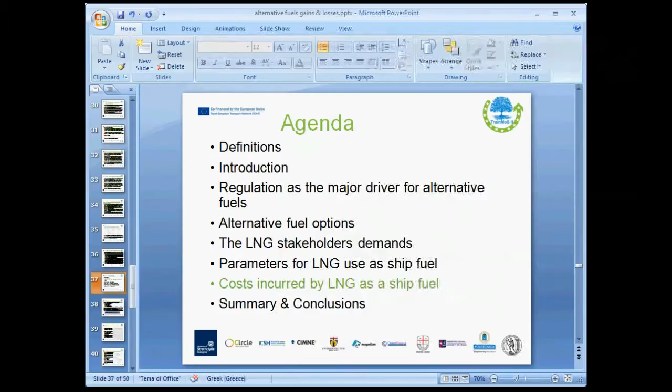So, after the short break, we're back to discuss the costs incurred by LNG as a ship fuel. So, with regard to the costs associated with converting the marine vessel to LNG operations, natural gas is not compatible with existing liquid fuel systems and requires modification of existing engines and changes or additions to the existing shipboard fuel systems, as well as other changes for safety reasons.

The conversion to LNG as fuel required changes to the marine engine, conversion of MC-C to ME-GI. The LNG inert gas needs also retrofitting the auxiliary systems, the LNG storage tanks, the fuel supply system, the removal of existing piping equipment, as well as tank foundations, deck houses, and foundations.

The table above shows the costs associated with converting 3 vessels of different sizes to accommodate natural gas. As we can see, depending on the type of vessel and the size, the engine cost varies significantly from 1.2 million for a tugboat to 4 million for a bulk carrier, while the fuel system cost is again high, ranging from $6 to $20 million, while the total cost of conversion may rise to 7.2 million to 24 million, depending on the type of vessel and the engine.

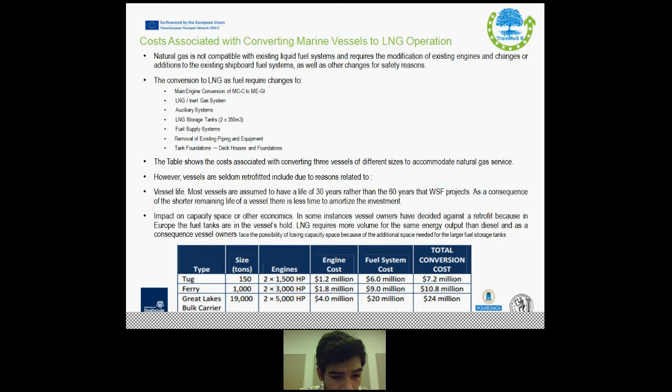In some instances, vessel owners have decided against a retrofit because in Europe, the fuel tanks are in the vessel's hold. LNG requires more volume for the same energy output than diesel, and as a consequence, vessel owners face the possibility of losing capacity space because of additional space needed for the larger fuel storage tanks.

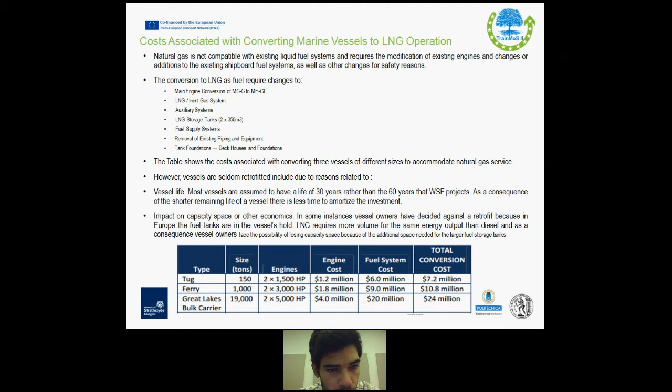A second incurred cost relates to the construction of LNG vessels and the payback time. With regard to that fact, the cost of building a new ship powered by natural gas has a premium over the construction cost of a conventional ship with fossil fuel. There is a cost increase for the gas engine and another for the gaseous fuel system associated with the LNG storage tanks. A Germanischer Lloyd study in 2009 noted an additional investment of approximately 25% over the cost for constructing a typical new container ship.

Another study from the Danish Maritime Authority details information on the return on investment or payback for LNG and HFO with scrubber compared with the use of MGO as fuel for ships operating entirely within ECAs. As we can see in this table, the payback time relative to MGO compliance strategy for LNG and HFO with scrubber.

In all case scenarios, as we can see, for different types of vessels, the payback time for scenario 1 of HFO with a scrubber for RoRo is 2 to 3 years, for a tanker the same, while for the container it is 1 to 2 years for retrofitting, while for LNG respectively it's 1 to 2 years for RoRos, 2 to 3 years for tankers, 1 to 2 years for containers.

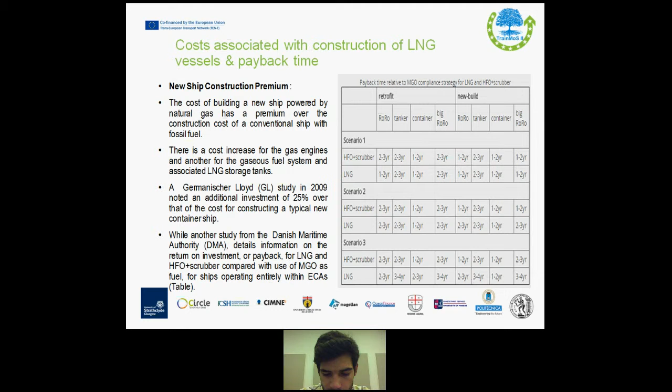Further on, a study by MAN and GL on the use of LNG to fuel container vessels indicates a payback time of less than 2 years for a ship sailing in the ECAs about 65% of the time, based on the current differences in fuel costs. These conclusions are roughly in line with the above-mentioned study. According to another DNV report, if a ship spends more than 30% of its operating time in an ECA, the cost of investing in gas fuel engines can be justified.

As can be seen in this graph, the payback of LNG technology depends decisively on the size of the vessel. As we can see, small container ships of 2,500 TEUs have a quicker payback time in relation to container vessels of 8,500 TEUs, or even large vessels of 18,000 TEUs, which have a considerably longer payback time in order to amortize the investments required.

On the basis of daily cost figures for conventionally and LNG fueled ships of different types and sizes, Royal Haskoning has calculated the relative costs. The LNG fueled ships are estimated to have 10% more capital cost than diesel fueled ships. They tend to have a capacity reduction from 2 to 5%. They tend to have also increased operational and insurance costs. However, they present fuel reductions of about 60 to 80% of heavy fuel costs on a net energy basis.

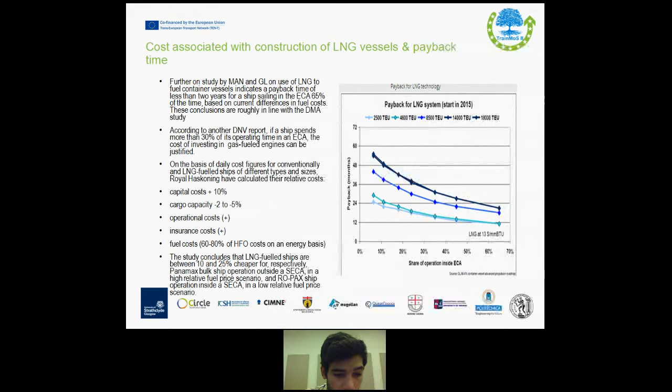The study concludes that LNG fueled ships are between 10 and 25% cheaper for, respectively, Panamax bulk ship operation outside a SECA in a high relative fuel price scenario, and RoRo pax ship operation inside the SECA in a low relative fuel price scenario.

Then we move forward to the costs associated with LNG tank selection and loss of capacity. LNG storage tanks require more space than traditional fuel oil tanks, which may reduce cargo capacity depending on type of vessel, the type of fuel tank, and the availability of a suitable location for the LNG tanks on board or in a tank room within the ship.

The challenges that exist in the storage of natural gas are the low temperature, which also requires special construction materials such as stainless steel and aluminum, special insulation, and provision of contraction of the tank, while challenges also include, with regard to the easy ignition and lower weight when it is warmer than the air, required adequate ventilation and other safety measures, large volume tanks, and finally the location of the tanks.

The current regulatory approach is based on self-supporting tanks as defined by the IMO IGC code. Type A, designed as ship structures, and Type B, prismatic and spherical, tanks are generally feasible for fuel gas tanks, but the requirement for pressure, maintenance, and secondary barriers raise problems which have not yet been solved in a technically and commercially sound way. This may be a future solution for ships carrying large amounts of LNG as a fuel. Hence, IMO Type C tanks, pressure vessels, turn out to be the most preferred solution for current designs.

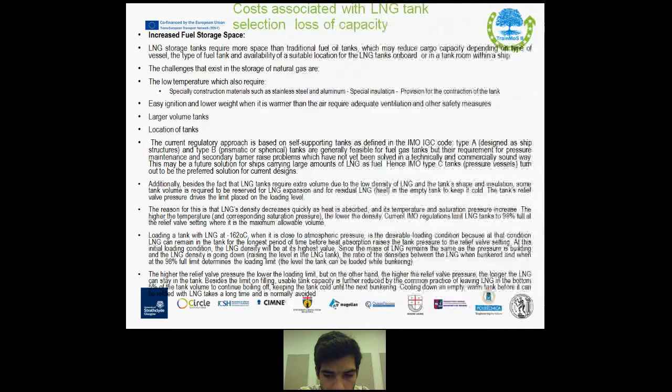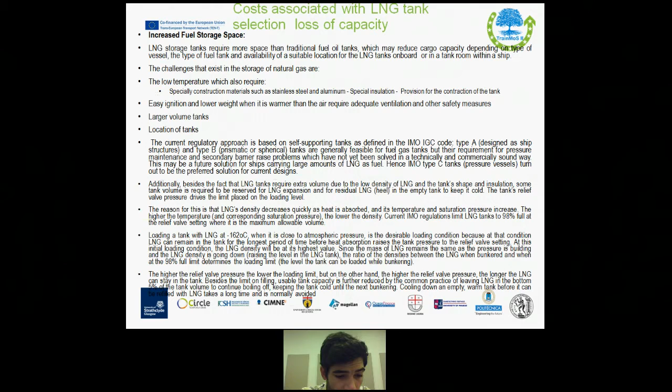Since the mass of LNG remains the same as the pressure is building, and the LNG density is going down, raising the level in the LNG tank, the ratio of the densities between the LNG when bunkered and when at the 98% full limit determines the loading limit, the level the tank can be loaded while bunkering. Finally, the higher the relief valve pressure, the lower the loading limit. But on the other hand, the higher the relief valve pressure, the longer the LNG can stay in the tank.

Besides the limit of filling, usable tank capacity is further reduced by the common practice of leaving about 5% of LNG in the bottom of the tank to continue boiling off, keeping the tank cold until the next bunkering. Cooling down an empty, warm tank before it can be refilled with LNG takes a long time and is normally avoided.

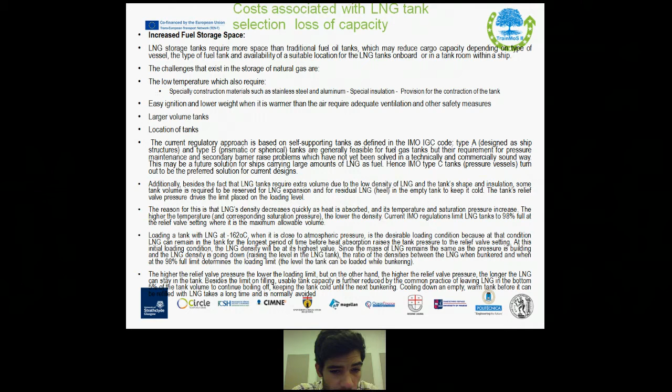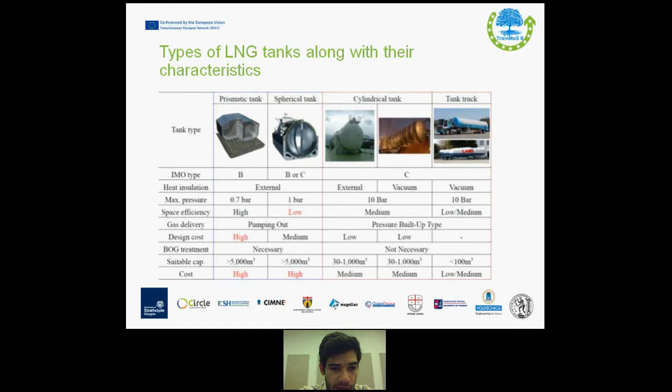Further on, another incurred cost and a barrier to LNG adoption is the bunkering infrastructure. One of the significant barriers to adopt LNG as a fuel is the fact that there is no infrastructure established among the supply chain network in place that can enable LNG delivery. Since the demand for LNG supply is still not high in the commercial shipping industry, the gas providers and bunker suppliers do not want to invest in the necessary infrastructure until they see an increase in demand. At the same time, since the supply chain and infrastructure are still not developed to be able to deliver LNG, the ship owners are not willing to invest in LNG fuel ships.

This is considered one of the main obstacles preventing the widespread adoption of LNG as fuel and reminds of the classic chicken and egg problem, or else who will move forward to make the investment first? Will it be the port developers who will initiate the investment processes to invest in bunkering infrastructure, or will it be the ship owners who will firstly build their LNG fuel vessels, and afterwards the infrastructure to accommodate them will be required to be made?

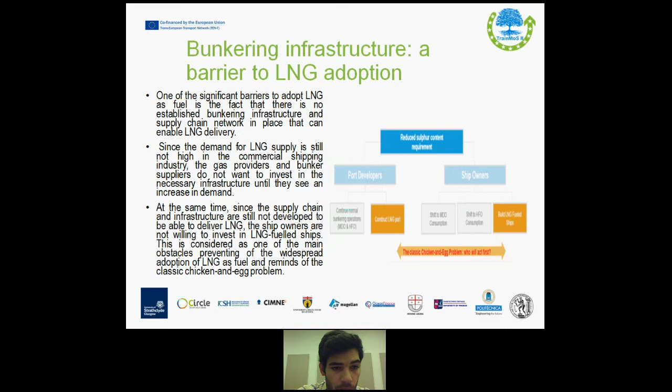So, the costs with regard to the port infrastructure: take into account the business model for LNG terminals in ports hinges on four major factors: regional maritime demand for LNG, available for liner shipping mostly, availability and type of neighboring terminals, demand by non-maritime stakeholders with regard to road, inland navigation, industry purposes, and power generation, while the last of these three criteria has a major influence on the viability of any large import terminal that combines the supply of LNG to ships with import activities.

The larger the terminal, the lower the distribution costs. As we can see in the first picture, the cost of LNG distribution at a 10 years payback time for a large LNG terminal is €118 per ton. But as we move to the medium, the cost increased to €137 per ton, while for small LNG terminals, the cost rises to €194 per ton, meaning that the large LNG terminals might exploit significantly the economies of scale.

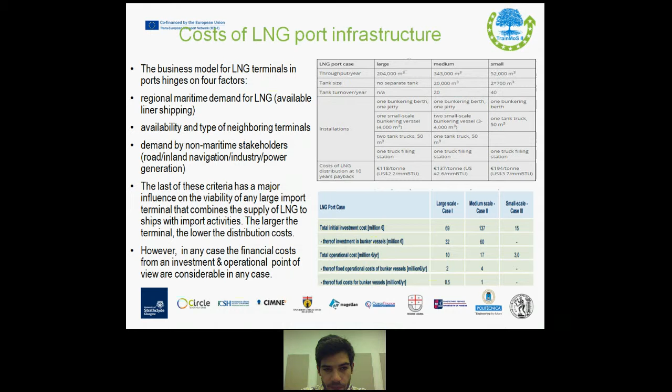Finally, in order to solve the LNG infrastructure problem, it is necessary that the port authorities, ship owners, local communities and other stakeholders work together on assessing the current and future demand for LNG in ports to plan and establish a sufficient number of LNG infrastructure. Since many owners are willing to spend on LNG propulsion, the number of LNG infrastructure will increase, and as demand for LNG increases, the incremental cost of infrastructure will naturally decline.

Many governments have announced their support for LNG as a fuel for navigation. In Europe specifically, for example, the European Commission published in January 2013 a new directive aimed at assuring new infrastructure for alternative clean fuels. The project identifies LNG as the most convenient shipping fuel. Therefore, the European ports are most likely to be able to provide sufficient LNG services.